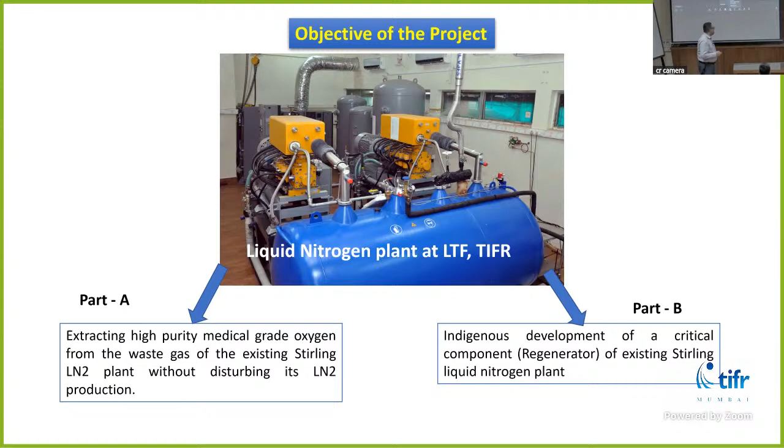Now, to make you more convenient to understand, the nitrogen plant operation is something like this. We have a compressor where atmospheric air gets compressed, then it's purified basically to remove the moisture, hydrocarbon and carbon dioxide. Then it passes to the gas separation where it gets separated into oxygen and nitrogen, and the nitrogen gas is collected and then gets liquefied in this liquid nitrogen plant.

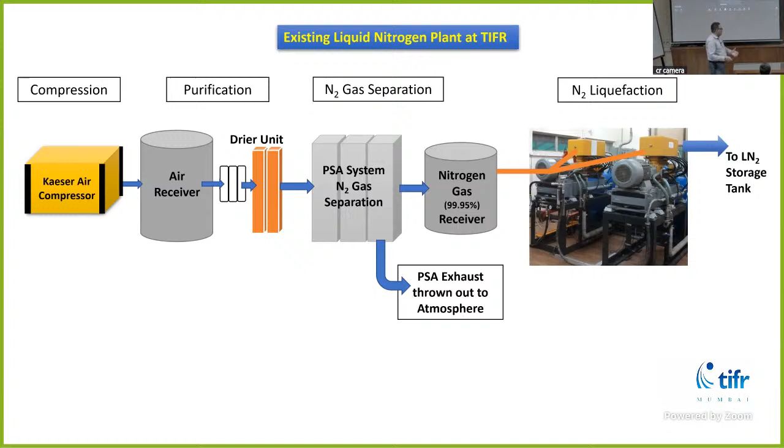Now here, the PSA, what is PSA, is like a pressure swing adsorption system. So one system will be used while the other will be in regeneration mode. I will explain in the next slide. So this PSA exhaust, the waste gas, is thrown into the atmosphere, which is our point of study here.

Now when we are doing this PSA separation of oxygen and nitrogen, which is a very standard technique, it is based on the absorbent selection. If the absorbent is carbon molecular sieve, it has a capacity to absorb oxygen and release only nitrogen. So if this carbon molecular sieve is filled in this tank, when you pass air through it, all the oxygen gets trapped into the absorbent and the nitrogen goes out as the product gas, which is then liquefied.

Now if I change this adsorbent to zeolite, the zeolite has a capability to absorb nitrogen and release oxygen. So by changing this absorbent, the current plant can be converted into a liquid oxygen producing plant or a nitrogen producing plant. But it is only one at a time, not both. So it can work as either nitrogen production or oxygen production.

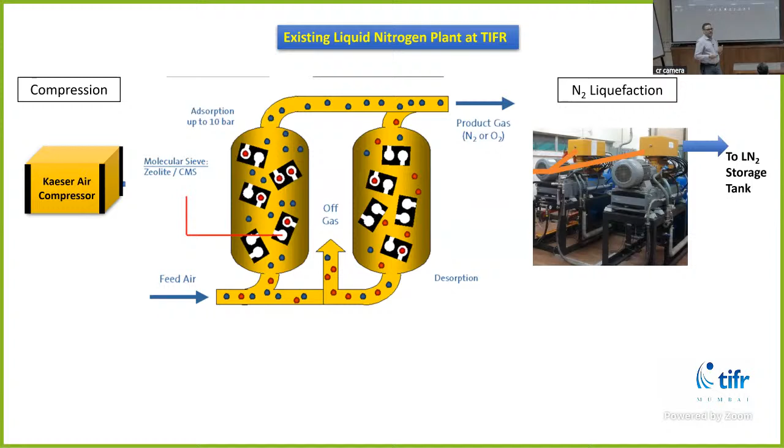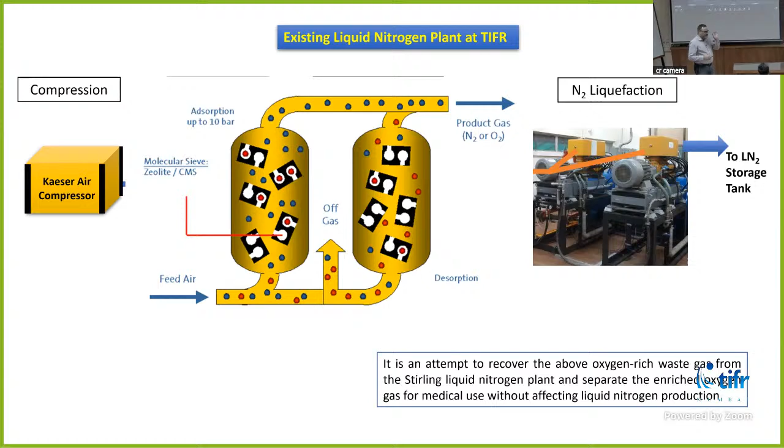Whereas our objective is, without disturbing this CMS or the nitrogen producing process, how do we get out the oxygen? That is the whole challenge here. So the attempt is to recover oxygen-rich gas without disturbing this liquid nitrogen production. That's the main catch point in the whole project. How do we go about it?

As a basic methodology, the gas we get from the PSA exhaust, oxygen-rich air, gets condensed in a condenser. For condensing, we use the liquid nitrogen produced from this plant. When the gas condenses, it becomes liquid air, oxygen-rich base, and it goes to our cryogenic distillation where, based on the boiling point, it gets distilled, and we throw out all the nitrogen and get high purity oxygen.

Whereas the actual process has a lot of components: a pre-cooler, condenser, distillation column, recondenser. So many components are there. We need to monitor various parameters like mass flow, pressure, temperature, level sensor, and purity. These all need to be monitored to have process optimization so that you achieve high purity or medical grade oxygen.

So this talk will describe, the first portion of the talk will describe the development of a process visualization screen in LabVIEW, which combines a monitoring tool and also a data logging tool. That is what they are going to present in the first part. So the preamble is that it is part of this project; only the development of the screen, the automation part, is the focus of today's presentation.

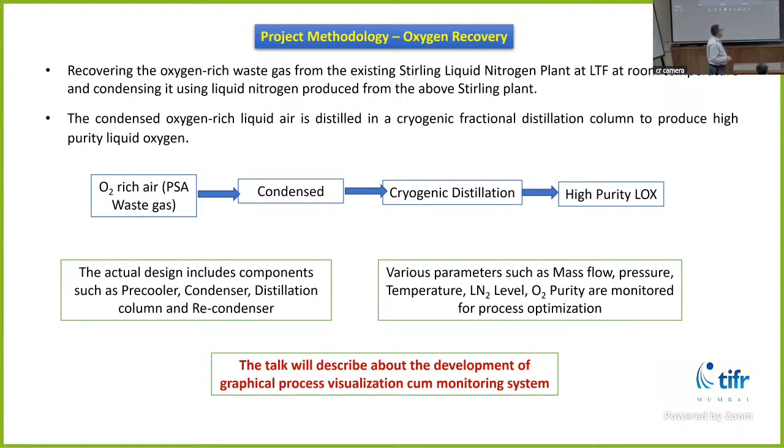And this typically shows the density of the work, where we get the oxygen-rich air. So you have to measure various values. Then it goes to a condenser that is filled with liquid nitrogen, gets condensed, and then goes to a distillation column where it gets distilled, where we get the high purity oxygen which gets collected in this tank.

Whenever we optimize the process, whatever cold vapor results because of the hot air coming in, we have to reutilize it using pre-cooling so that the usage of liquid nitrogen is reduced. So the gas going in gets pre-cooled with the vent gas, which is anyway thrown out.

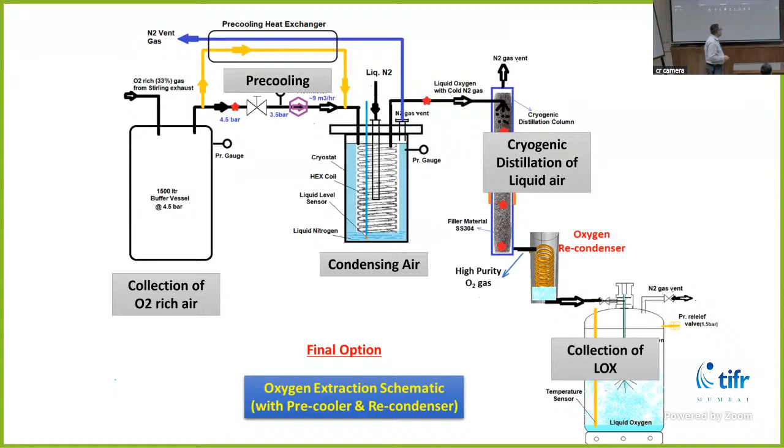Now coming to the second part, the first portion is what we have up to here. Now we are going into this cryogenerator part. This works on the Stirling, reversed Stirling cycle based thing, where the working medium is usually helium gas. The helium gas is subjected to compression and expansion process. That compression leads to an increase in temperature and expansion leads to a reduction in temperature. So it's in a closed cycle.

It goes out in a synchronized manner such that the gas is continuously compressed and then continuously expanded. So this portion gets cold over a cycle because this runs at a very high frequency, from 36 hertz to 50 hertz, in one revolution of the crankshaft.

So these are all the components. You have a piston, so when the gas gets compressed, it gets cooled with a cooler. Then it passes through the regenerator, which is of our interest. Then it goes here and gets expanded. So when the nitrogen gas comes here, it gets condensed. During this, these components are part of the cycle.

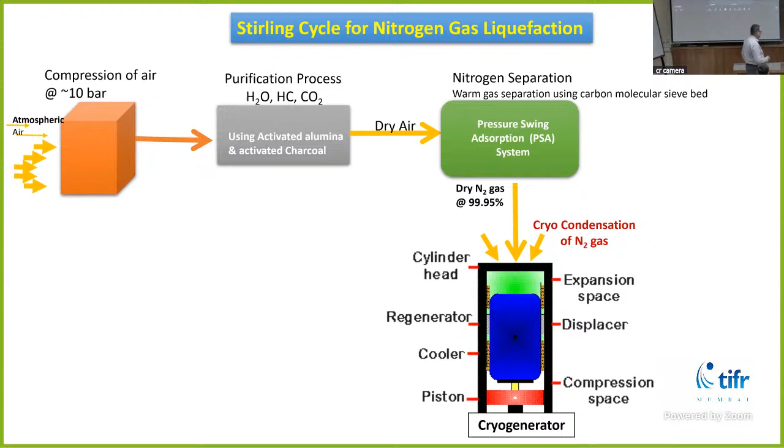So now the regenerator is nothing but a heat exchanger. Normally there are two types of heat exchangers: recuperative and regenerative. This is a regenerative heat exchanger, where the gas can go in one direction but does not come out at the same time. In the next cycle it comes back in the reverse direction, the same path. So it is the heart of this plant.

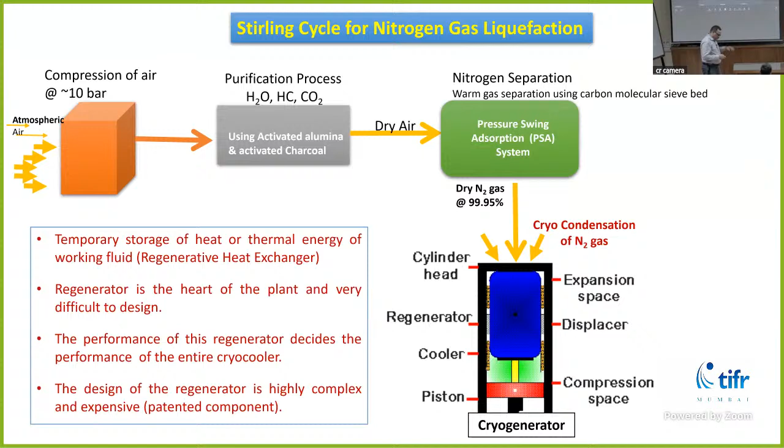The performance of this component will decide the performance of the cryo refrigerator or cryo cooler. The performance and design is highly complex because it's patented. This plant design is from the 1950s, because nobody could come up with a much better component that could be used for commercial and large capacity plants. So it's a bit complex, the design of it. This is what we wanted to work on, to place more emphasis on it.

When the cycle operates at high frequency, the temperature of the expansion space keeps changing. What we are interested in is the regenerator here - this is the inlet and this is the outlet. So I will show the next component. The outlet of the regenerator, the gas keeps going down and down. So if you see at the compression space, the temperature increases, the cooler brings it back, through the regenerator and into the expansion space.

The point I would like to mention is, the temperature at the inlet is the same, and the temperature at the outlet of the regenerator keeps coming down to a saturation temperature, going up to 65 to 50 K, depending upon the gas and the operating pressure. It has a large value depending on the frequency. So the typical regenerator effectiveness should be designed up to 99.7%, which is the actual value. Designing a regenerator or heat exchanger of such high effectiveness is very, very difficult.

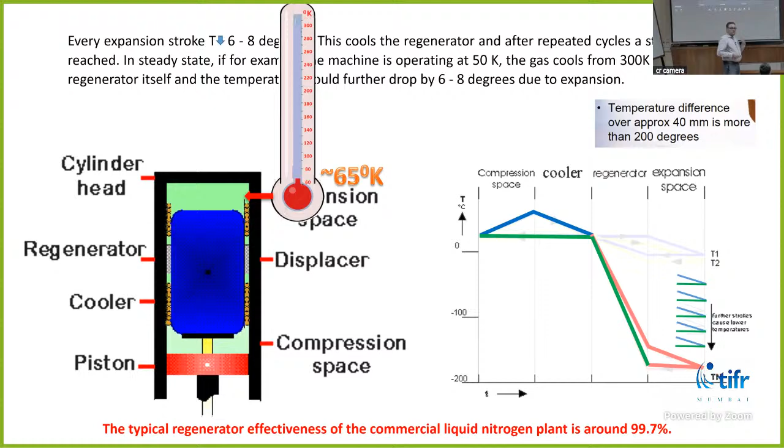And the regenerator component is about 40 mm in height. You see, one side is 300 K and the other is about 50 K. So there's a huge temperature gradient. This also gives an idea of how critical the component is.

The actual regenerator used in the existing plant, the patented version, consists of many such layers. It is a woven wire mesh - not a net, a woven wire mesh. Many such layers are stacked to form a shape. This is about 50 mm - this is the height of it, 49 mm, and it's about 100 mm diameter. So it's such a small portion.

And then this inlet is 300 K. Here you can go down to 50 K or so. This is an actual SEM photograph of the thing - about 30 micron.

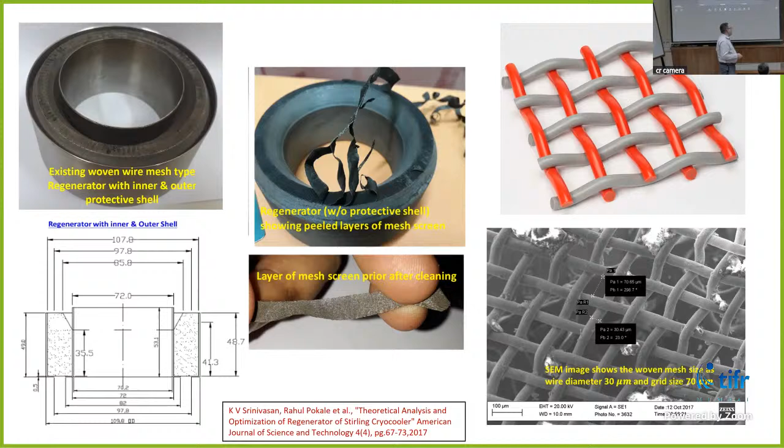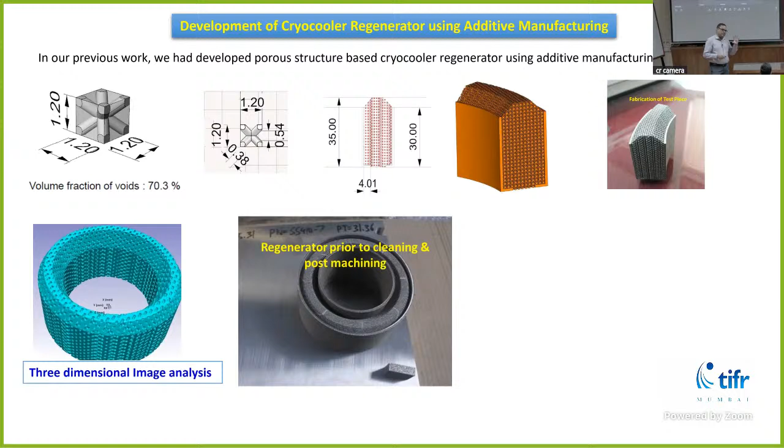So now, what we did as part of our previous project, after detailed study, was develop a BCC lattice structure with the same amount of porosity, keeping packing density constant. Based on the CAD modeling, we made a three-dimensional print using additive manufacturing to get the proper result. In fact, this was the first component ever made in cryogenics this way.

To reach cryogenics in one shot - there may be components which may need something more to give it - so it is a single ready-to-use component which can go to cryogenics. This was one of the things, and we have a much referred paper. This is what I presented in the last one, in 2019.

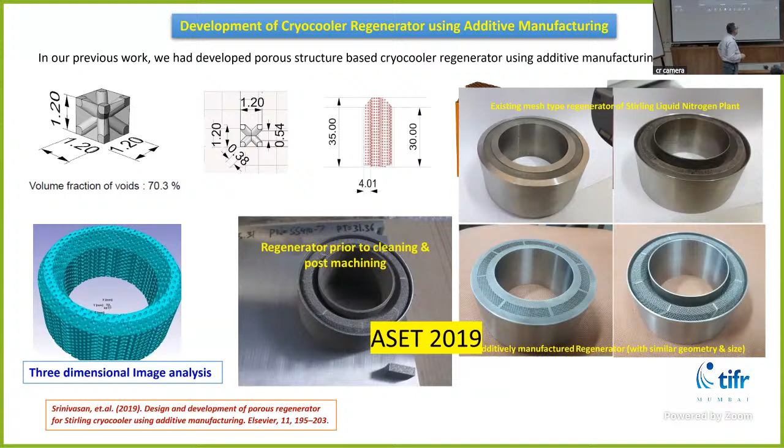In this current project, after the previous one, we have made many changes in the lattice structure and other components. What we are going to focus on in the second part is changing the porous structure in the lattice component and the structure.

We also want more contact of the gas with the matrix, what we call the metal part, and this gets improved by adding some baffles. So the current exercise is to add baffles in addition to this porous structure, and to make a material and study the fluid dynamics so that the output of this study would go directly for additive manufacturing.

When you do that, a lot of things have to be checked, whether whatever we design can actually be printed or not. So that we need to check. That is what the second project is about. This is actually the preamble to this whole project.

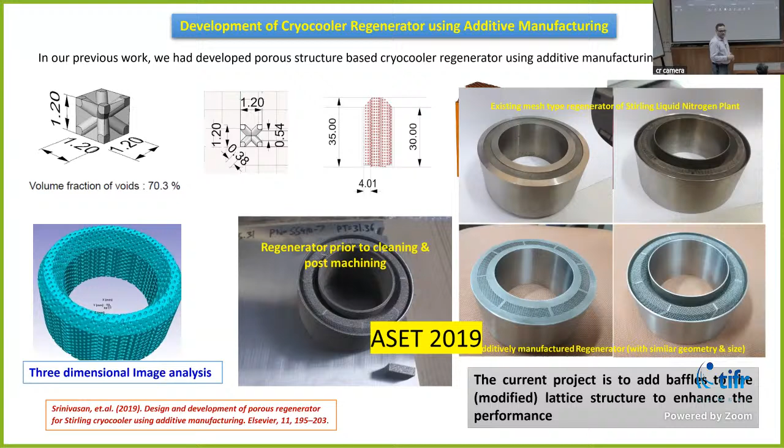Now I will ask this first group to present their work regarding oxygen separation, automation, and the oxygen separation. Please.

Good evening everybody. I am Woodrow Gonsalves, along with Saiesh Vandkar and Srushti Hallur. We're going to be talking about the addition that we've done to the liquid nitrogen plant.

Majorly, it is a data acquisition system based on LabVIEW. What I mean by data acquisition here is to digitize the analog signal, to sample it, and to store it. So that is as far as my definition of data acquisition goes for this project.

I would now like to call upon Saiesh to take us through the objectives. So in the beginning of the project, Sir described or briefed us on some of the objectives, like what he wants at the end, how the end product should look like.

Coming to the objective, the first objective was to have process visualization, by which I mean that whenever a layman sees the main screen of the LabVIEW, he or she should be able to know what is going on in the plant, or what processes are required to get the pure oxygen at the end.

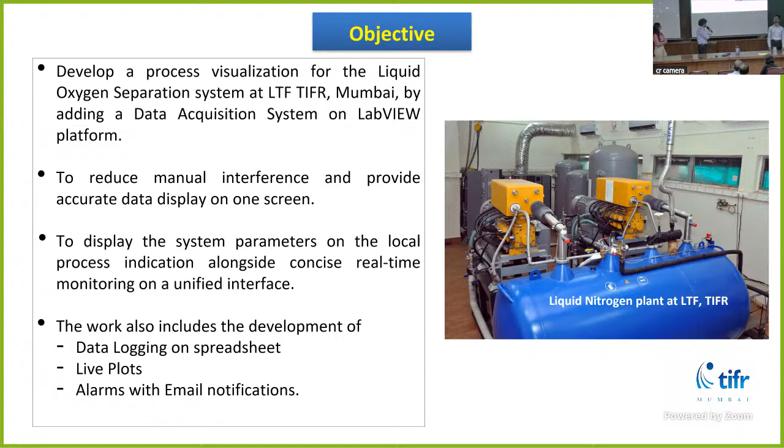In the fourth point, you can see there are three subpoints, which will be explained later in the presentation. Now me and Woodrow would take you through the hardware aspect of this whole project.

As I say hardware, you should be very careful about what you choose to run that hardware system. You should choose the devices and instruments according to your requirements, adhering to the specificity. We have chosen these five sensors: first is temperature sensor, second is pressure sensor, third is oxygen purity, fourth is mass flow meter, and the fifth is liquid nitrogen level sensor.

You can see in these three there is a local indication of the values, but the temperature and pressure sensors don't have any. So to tackle this problem, we chose this process indicator of Selec. There is a particular reason we chose this peculiar process indicator, so Woodrow will further explain the reason.

Now I will come to the main component, the heart of our system, which is the PCI 1805 card. This is the data acquisition card, which helps in converting all the field data and digitizing it before sending it to the computer.

Now you may ask how we connect this PCI card and gather all the field information. This is the terminal block of Adam 3962, which acts like a mediator between the field signals and the computer. The terminal block is connected to the PCI using female connectors. Now I would call Woodrow to further emphasize the hardware part.

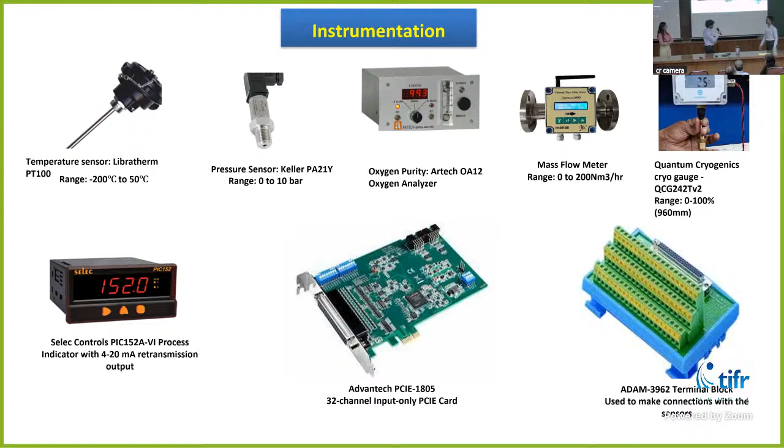So the liquid oxygen plant is divided into 5 parts, and each part plays an important role in terms of the parameters that have to be monitored. This slide is supposed to give you a visual representation of the system that we've built.

It starts with this sensor, which is connected to the process indicator that you can see locally. Then the output of this process indicator, in terms of its retransmission output, goes into the terminal block, and via the DB62 cable, it is attached to the PCI card, which is fitted into the CPU. Further, it takes over into LabVIEW, and the processing happens ahead.

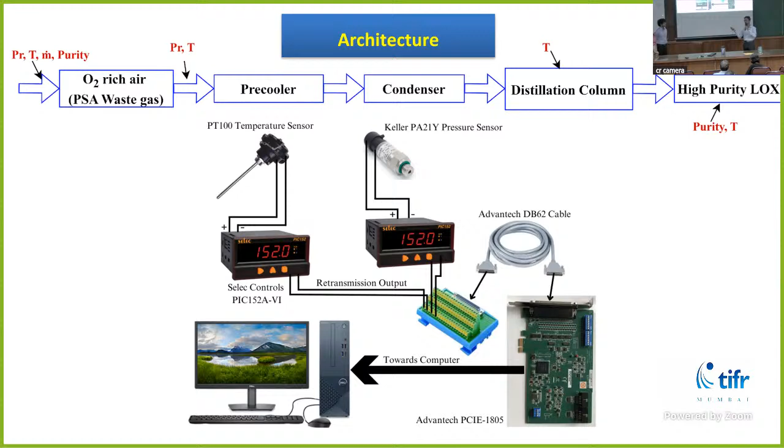To talk about the connection diagram, the transmitter is working in a 2-wire mode. What I mean by 2-wire mode is that you're powering the sensor and getting the signal using only 2 wires. How am I doing that? By using the 24-volt onboard DC supply of the process indicator itself.

Now, to measure the output, which is in the form of a 4 to 20 milliamp current loop on the input side, it's being measured by the onboard milliammeter of the process indicator. Parallelly, you have an isolated output. The reason for taking this output is because if you add both in series, it becomes a problem. So there is an isolated output in proportion with the input loop.

This output produces current in proportion with the input current. So the output current goes into the data acquisition card, where it's digitized and further displayed.

Now, that was all about the hardware part and all that you needed to know. Now, to guide you through the software part, Srushti would take over.

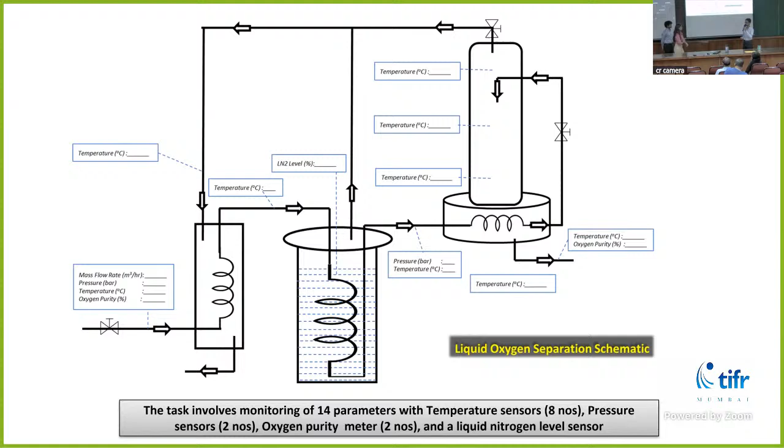So what is LabVIEW? LabVIEW stands for Laboratory Virtual Instrument Engineering Workbench. Unlike other traditional programming languages, LabVIEW has graphical blocks known as virtual instruments, or VIs, that are used to design control systems or automate measurements, and we can visualize data efficiently or create applications. LabVIEW is a graphical visual programming environment that was developed by National Instruments.

Further, I have included certain major codes that we have developed throughout the project. First, I will go through the database part. What is a database? It is very important because all the data coming from the sensors gets appended at one location, that is, a Google spreadsheet in our project. Yes, we are using Google Cloud over here.

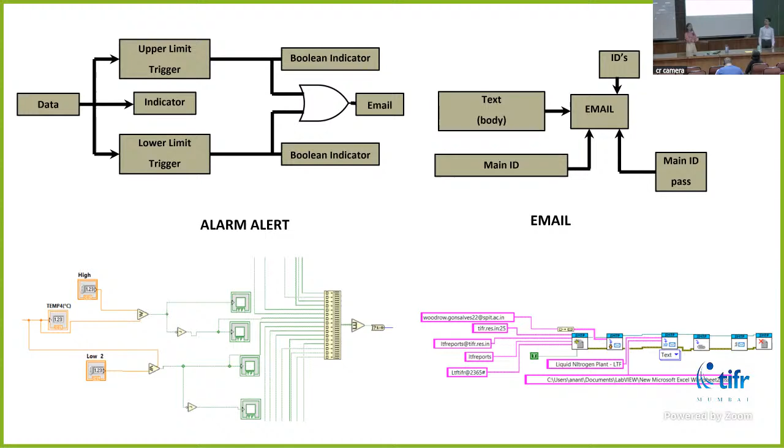A disclaimer to all of you: we have checked all the parameters and they are working, but due to some technical issues, we were not able to install the oxygen plant currently. So in some areas, some parameters will show garbage values allocated by the system. Kindly please ignore it.

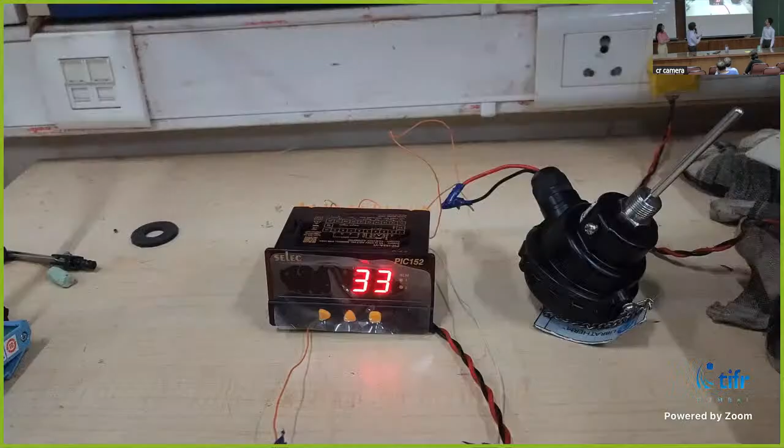As you can see, there is a temperature sensor connected to the local process indicator, which is connected to a terminal block, and via cable, the signal goes into the PCI card.

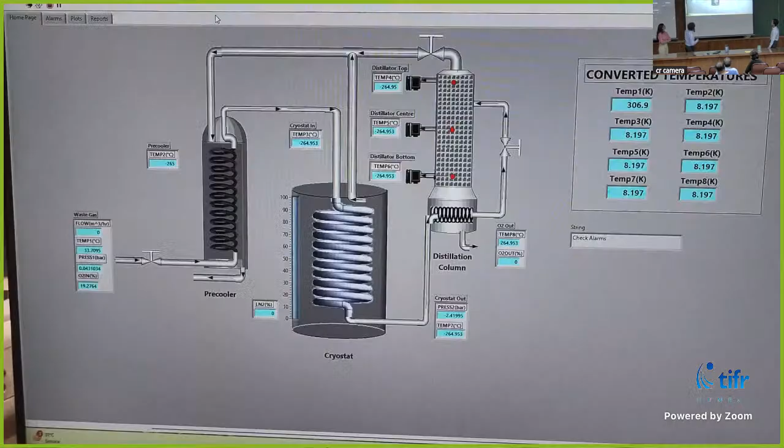This is the main screen where you can see the temperature and the live reading of the oxygen purity as well. Srinivasan sir wanted temperature converted to Kelvin, so this is the reading which is converted live.

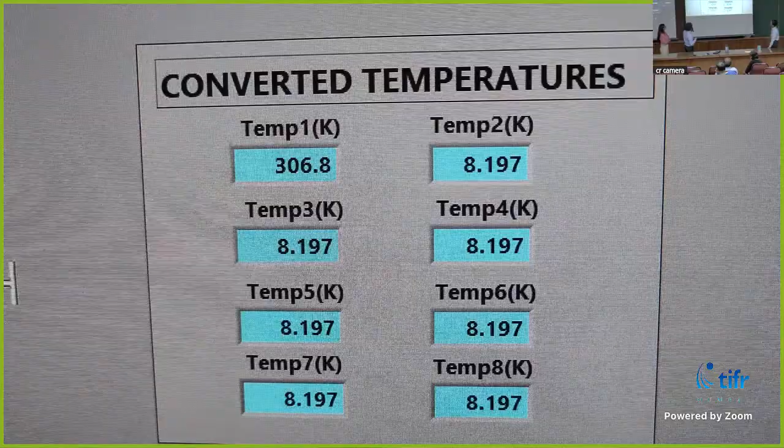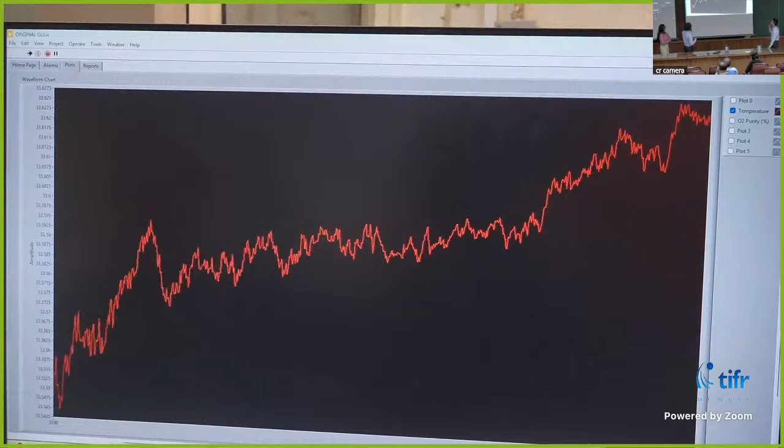So these are the plots. This one specifically is of temperature. As you notice the ups and downs, these are not noise. As you can see, the scaling goes to 3 to 4 decimals.

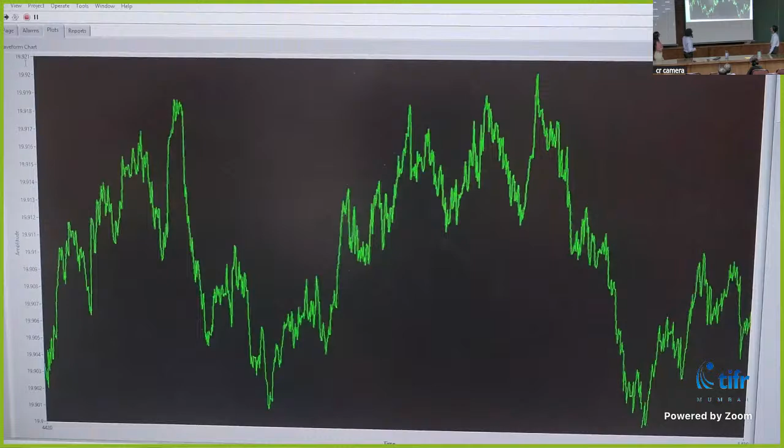Now we will show the Google spreadsheet, where you can see the live data, timestamp, and the date, month, year.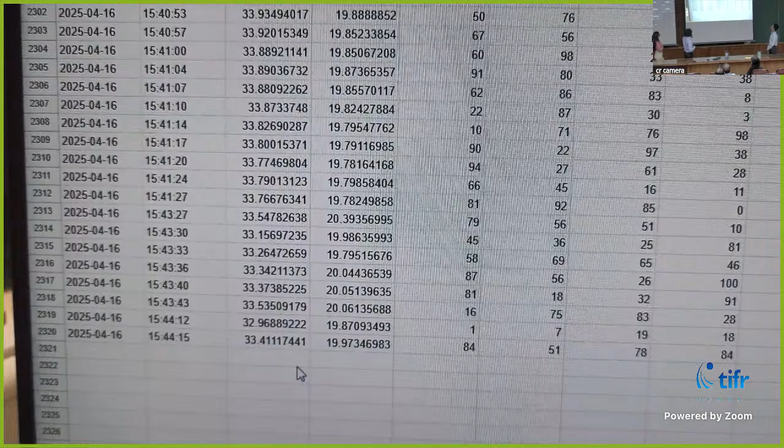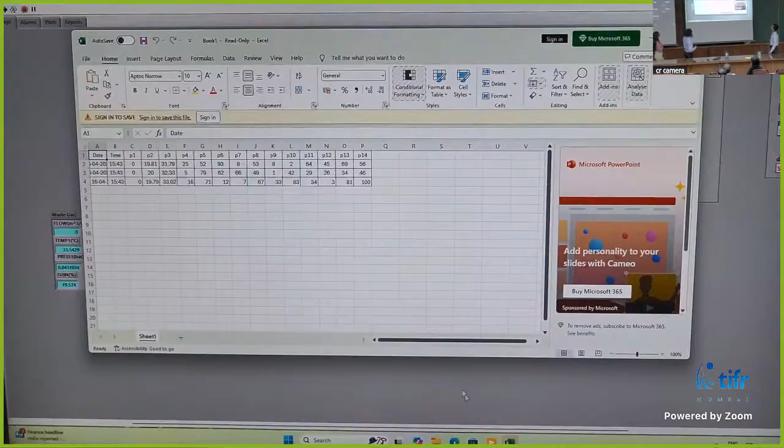Now as we start the process, the Excel sheet is opened, and again there is live data, timestamp, as well as the date and year. In the alarm, if we have set a high threshold and it passes, see the alarm went off, and we got a mail.

Now I would like to call Woodrow to summarize the results and outcomes and to present further.

So what have we done so far? What have we achieved? As he mentioned, there was a disclaimer. The whole system hasn't been set up together; it's been set up in different parts, and we are successful in testing each and every part.

Finally, we've achieved a graphical user interface. There has also been local process indication, along with simultaneous monitoring of the screen.

Another important part is that this work was recently submitted to the International Conference on Advances in Science and Technology, or as they call it, ICAST 2025.

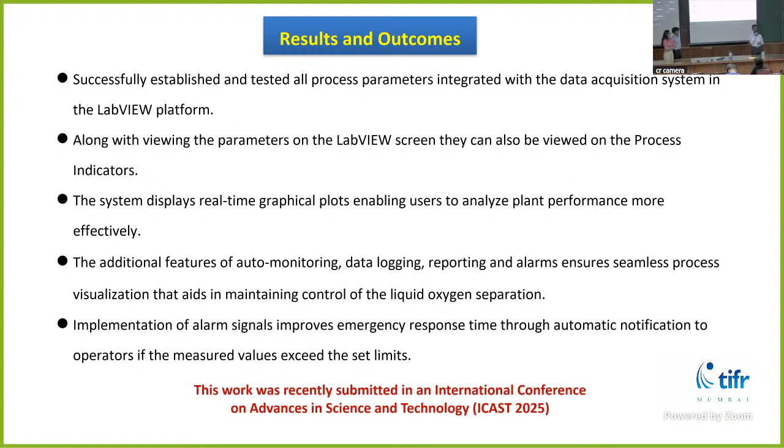Future improvements to this work include SMS notification instead of email, which can then be received online, as can an email alert. The distillation column still needs some sort of manual control, which is negligible, but it can be done further using LabVIEW, not just through our system.

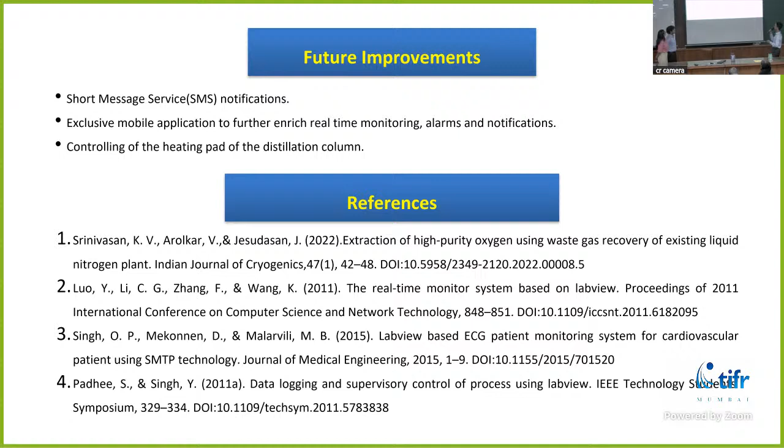These are the references. Finally, I would like to thank our mentors for guiding us throughout this project: Dr. K.V. Srinivasan sir, Tulsiram sir, and Satyanarayan sir.

The aim of the LTF staff is always to help us, and they have quite established that in helping us in our project continuously, Ms. Karande sir, who has helped us, and Avinash sir.

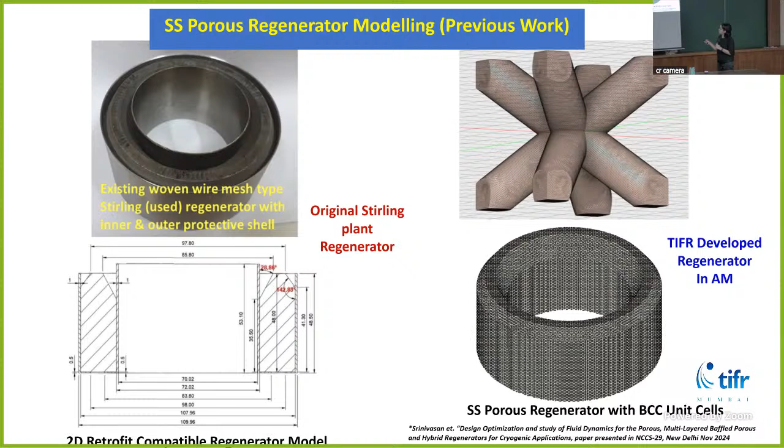We then move to the ANSYS Fluent simulation software, where we conduct computational fluid dynamics, or CFD, simulations to analyze the temperature, pressure, and velocity drops across the baffle type porous regenerator. We target a higher temperature drop and a higher velocity drop, as well as a minimal pressure drop, to increase the efficiency of heat exchange and cooling throughout the regenerator.

We take these results and initially compare them with previous work on the baffle-free stainless steel porous regenerator. Then we cross-verify them with results obtained again from REGEN 3.3. Additionally, we conduct a stress analysis on the BCC structure using ANSYS Fluent software to identify the maximum von Mises stresses that develop throughout the porous structure when subject to the working pressure and temperature.

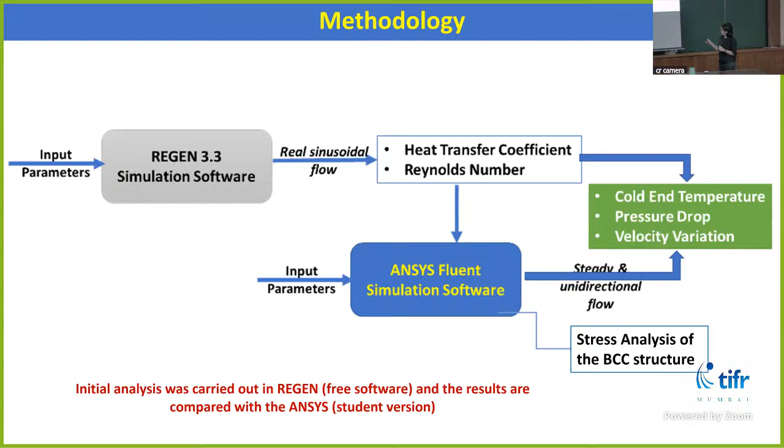These baffles were designed with key objectives in mind. To increase the residence time between the gas and the matrix, 2,500 baffles were designed and modeled in 10 rows with linear high density packing and a 7-degree gap. Additionally, to minimize obstruction of gas flow and minimize pressure drop, the baffles were aligned crosswise with each other and positioned in the corners of the matrix.

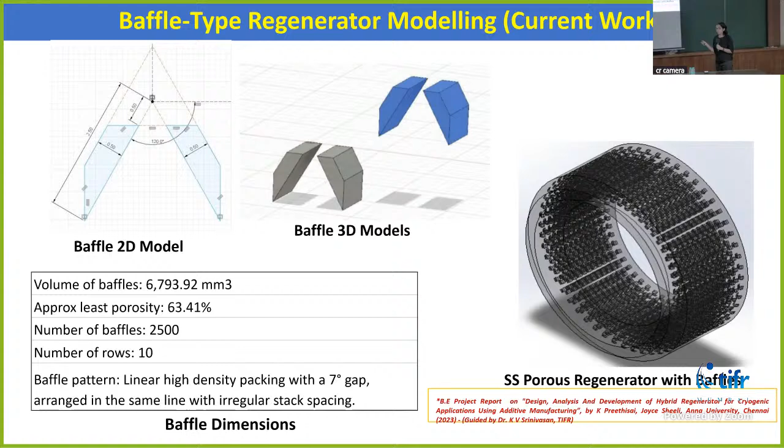Now we move to the first step, the REGEN3.3 analysis. The inputs were chosen to closely model the actual working conditions of the LTF plant. The working fluid was helium gas, the matrix material was stainless steel 316L, the pressure ratio was 1.25, the average pressure was 27 bar, and the inlet and outlet temperatures were 300 and 30 Kelvin. The other input parameters are tabulated here.

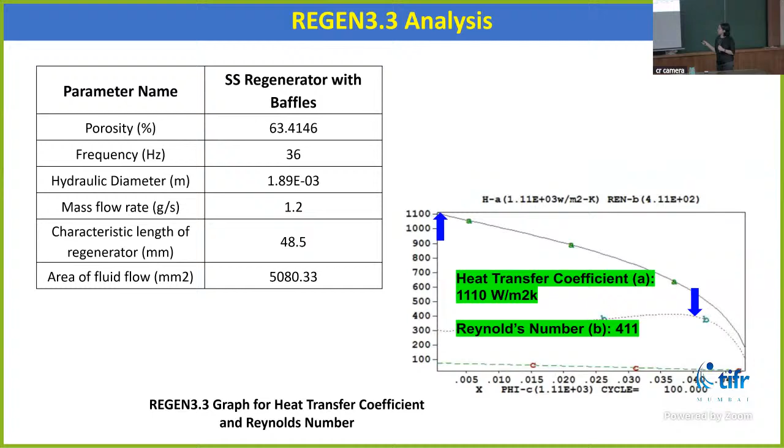REGEN3.3 was first used to calculate critical input parameters for the ANSYS analysis, namely the heat transfer coefficient and Reynolds number, shown in this graph. After that, REGEN3.3 was used to calculate the pressure drop, temperature drop, and velocity drop across the length of the regenerator, to later cross-verify and validate the results obtained from ANSYS. These values were taken at the outlet of the regenerator and at the final cycle, or endpoint, of the simulation runtime.

Now we move on to the ANSYS flow analysis component. For ANSYS, we considered a configuration with steady state flow with absolute velocity and pressure formulation. Let's begin with this table, which first shows the simulation inputs at each window of the ANSYS software. For the mesh metric, or element quality, we targeted as high a quality as possible, and we obtained an average of 0.74 with a maximum of 0.98.

For the cell zone conditions, we defined the regenerator as a porous body. To calculate these values, we first obtained critical inputs from the CAD model directly, such as the volume of fluid flow and the wetted area. We used formulas established in the literature to calculate values such as the relative velocity resistance and the inertial resistance coefficient.

Based on the Reynolds number from the REGEN3.3 analysis, which was lower than 2000, we selected a laminar flow model to represent laminar flow conditions. We kept the energy model on to account for heat transfer, and the heat flux at the walls was considered to be 0 for simplicity of analysis, since it was assumed there was no lateral heat passing.

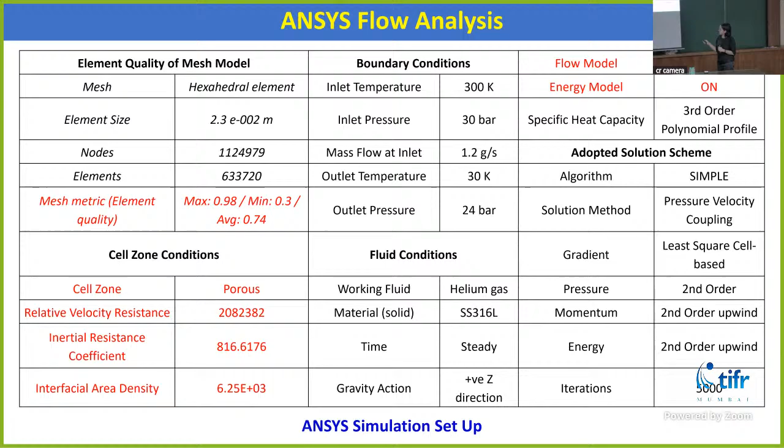Now shown here are the outputs obtained from the ANSYS software. We have the pressure, temperature, and velocity variation across the length of the regenerator, taken at the outlet. Here is the graph of the scaled residuals from ANSYS, which indicates that the errors converge to mostly acceptable limits after about 5,000 iterations, indicating solution accuracy.

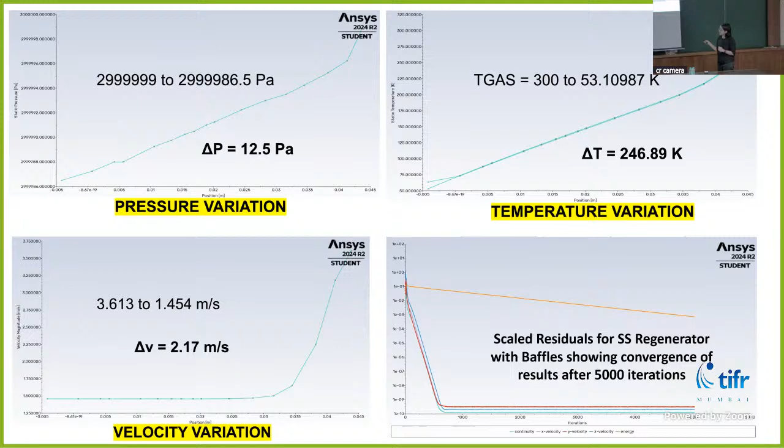Now we have the stress analysis component. This involved applying the working pressure to the lattice structure in order to observe the maximum equivalent stresses that develop in different areas of the structure.

To do this, we first imported a single unit of the BCC unit cell into Fusion 360. We created a linear pattern and added walls at the edges, following the procedure established in similar literature, but for slightly varying dimensions.

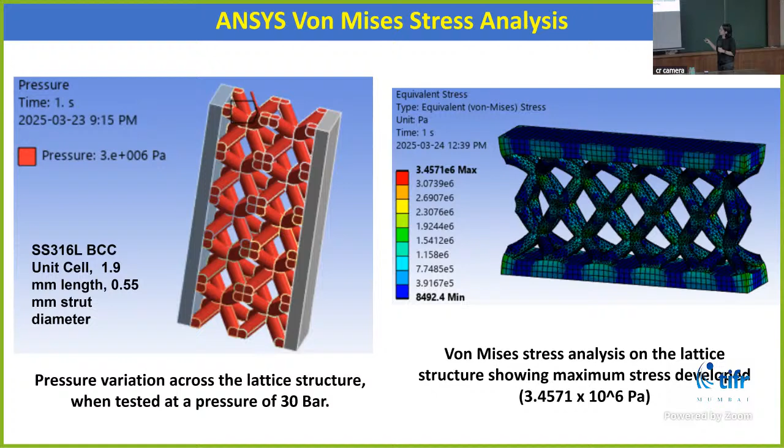Once we had this, we applied a pressure of 30 bar throughout the entire porous structure, and you can see the distribution of the pressure in this diagram. In this diagram, you can see the distribution of the equivalent stresses that develop in different parts of the porous structure, which is the result of this analysis.

So now we move on to the overall results, beginning with the flow analysis. First, we compare the ANSYS results for the baffle type regenerator to the results from the previous work, which were also obtained from ANSYS. You can see there's a significant improvement in the temperature and the velocity drop when comparing the baffle type regenerator to the SS porous regenerator.

There is an improvement from 104 to 246 Kelvin in temperature drop, as well as an improvement from 1.7 to 2.17 meters per second in velocity drop. This is an indication of improved heat exchange and cooling efficiency throughout the regenerator when the baffles are added.

With the pressure drop, however, a slight increase can be observed. It is extremely minimal, only a 2 Pascal increase from the previous, and 12.5 Pascals in total, which is almost negligible when looking at the working pressure of 3 megapascals. So it doesn't impact the efficiency of the regenerator.

Then we compare the ANSYS results to REGEN3.3 to cross-validate, with the understanding that REGEN3.3 is a software that models pulsatile flow, which is more accurate to real cryocooler conditions, while ANSYS assumes steady-state unidirectional flow. You can see that some trends are definitely matched as per REGEN3.3.

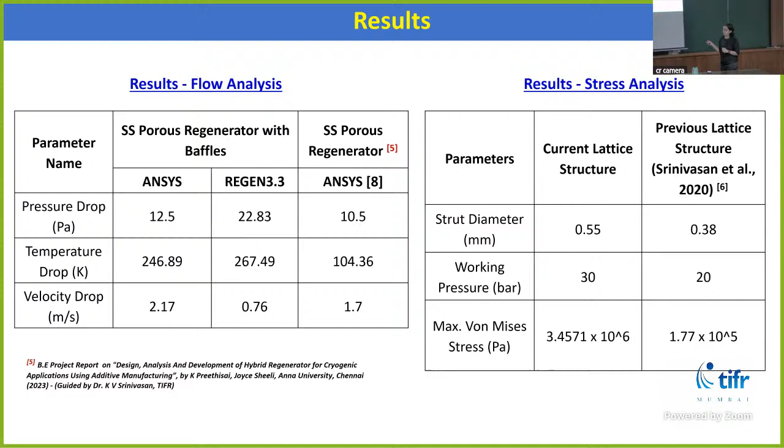So here we have some further details on the results. For ANSYS, about 25 iterations were conducted. The input parameters were varied from iteration to more closely model the cryogenerator conditions, and additionally the meshing had to be refined and fine-tuned to have higher element quality. Each iteration took about 2 hours on ANSYS to complete, and this was done over 4 months.

Similarly, in REGEN3.3, about 10 iterations were conducted with varying input conditions to more closely represent the plant conditions. For example, conditions such as frequency and number of cycles were varied. The current work has already been presented at an international conference, with the paper currently submitted to the Research Plateau Current Trends in Engineering and Technology journal, which is under review.

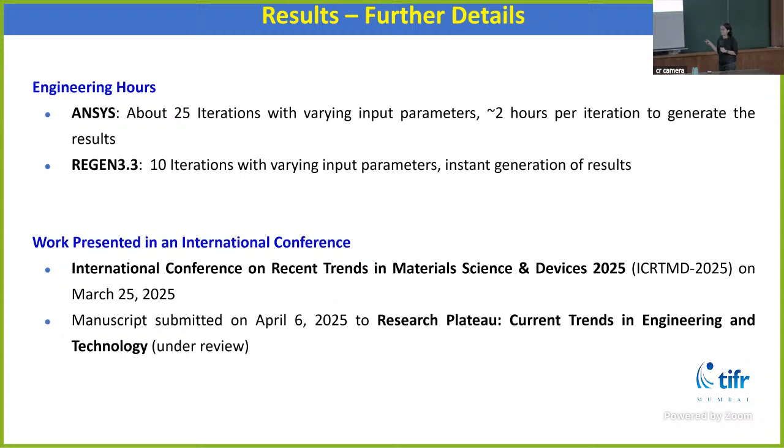So this brings us to our discussion. In conclusion, the SS porous regenerator with baffles showed significant improvements in heat exchange and cooling efficiency, seen through improvements in temperature and velocity drop, as well as a minimal, almost negligible trade-off in pressure drop. These results were cross-validated by REGEN3.3.

As for the stress analysis, the current lattice structure did show a slightly higher maximum von Mises stress than similar literature, but this is completely acceptable since it is much lower than the yield stress of the material. However, it may signify room for further optimization of the design.

As for limitations, the current study used the ANSYS student version, which comes with limitations in the number of nodes and elements that can be employed, which may limit the solution and results accuracy.

Furthermore, as previously mentioned, ANSYS was the main simulation software employed in the study, and ANSYS models steady state flow conditions, not transient or pulsating ones. So this may not give us the best idea of how the regenerator would behave in real conditions, but it does allow us to compare to prior work, and we can still take it into account while acknowledging the REGEN3.3 outputs, which can give a better overall picture.

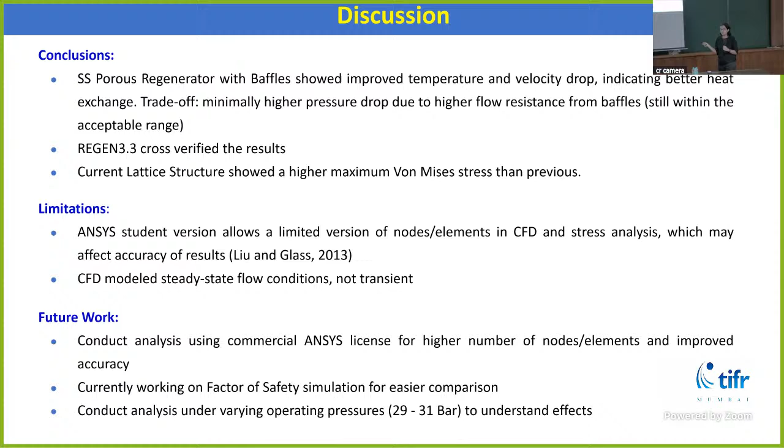We also aim to conduct the analysis under varying operating pressures to see what effect that has on the stresses that develop within the lattice structure, as well as on the temperature, pressure, and velocity profiles.

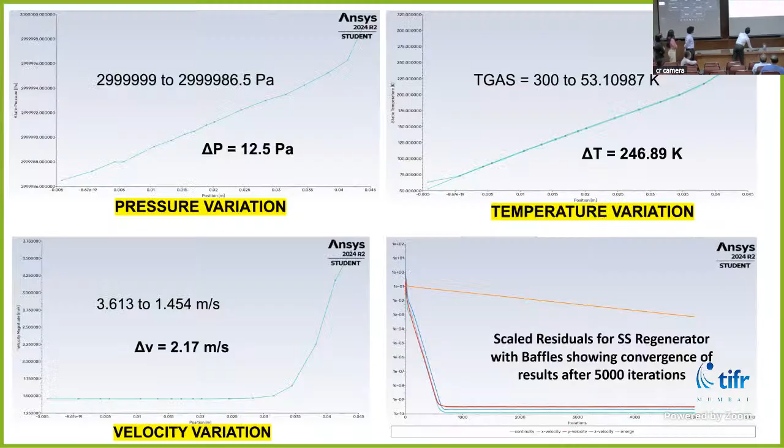Can you please go to the signal chain? Before this, yes before this. So from this local HMI to the terminal box, is this signal analog or digital? It's still analog, it's still analog.

So this sensor and the local HMI side is remote, and this terminal block and digitization system is also remote, far away. So do you think this analog signal is prone to noise if we digitize it right at the sensor level and transfer digital data instead? Would that be any better, you believe?

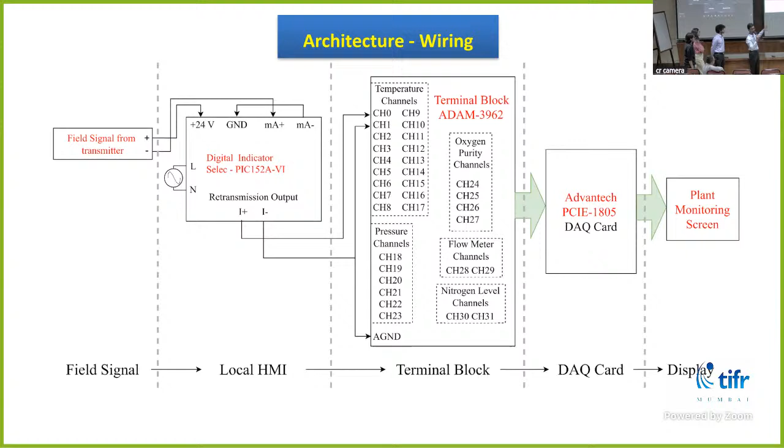That was a very interesting question, I was expecting this. The problem with that system is that we won't have any flexibility. Currently we digitize at our end, so you won't be able to alter the sampling rates, and you won't be able to have it done in parallel. You're talking about a system digitized right there, which sends data itself in packets that go serially. This way, everything is happening in parallel.

I can access any parameter at any moment of time. Given that we already had this data acquisition card with us, we went ahead with this system.

All the instrumentation was already procured earlier, as we had a practice of using transmitters with 4 to 20 milliamp output. In fact, all the instrumentation is 4 to 20 milliamp, so we had to live with that. Because of cost economics we didn't want to go for PLC, so we went with this approach, and it was the only option available since everything has a 4 to 20 milliamp output.

Yeah, so I have another question. In the software part, why are you using Google Sheets? Is there any particular reason? I just want to know. There are other options like MQTT, InfluxDB, those stuff. So is there any particular reason?

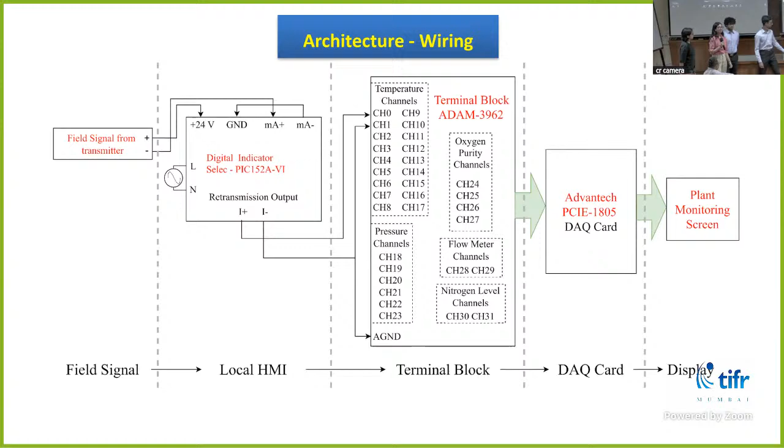We actually tried to use SQLite before this, the database. For a week I tried doing that, but it was not happening somehow. Yeah, it's difficult to use. Exactly. Okay, first of all, Google Cloud Console was free, and it was cost effective, and the database got appended, it got worked in a week itself. So we continued with it and did not try any other.

For other options like MQTT and those stuff, you also have local hosting options instead of going to some server. So if you want data protection and something, this is also a good option. But okay, Google Sheets is much easier to use. But for most of the proper IoT establishment, I have seen mostly they use this MQTT and other IoT optimized protocols.

Is any of your pressure or temperature sensors coming in contact with the oxygen, because some oxygen rich environment may lead to some ignition? So is any care taken for that? I think Srinivasan sir, who has more knowledge, can answer it.

The process is not yet ready. In fact, we have to optimize the parameter based on the input of what we get from this project. So probably, as I said, the distillation column, we need to achieve the temperature of liquid oxygen at the bottom. To maintain it, how to add the heat energy to the column, which will be done by the heating pads. So based on the various temperatures we get, we have to adjust the heat flow. We had some base information from the pre-work, but this will give a complete idea of how to go.

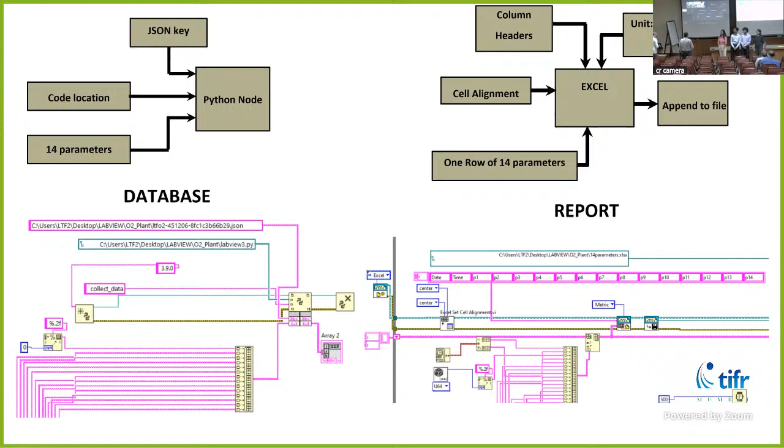Srinivasan, sorry, I was on mute, but really, thank you so much. I'm sure that with the consistent effort which you and your team are putting in, we are very near to success. As director of Sterling India, whatever support we can render, we are absolutely open and eager. Thank you so much.

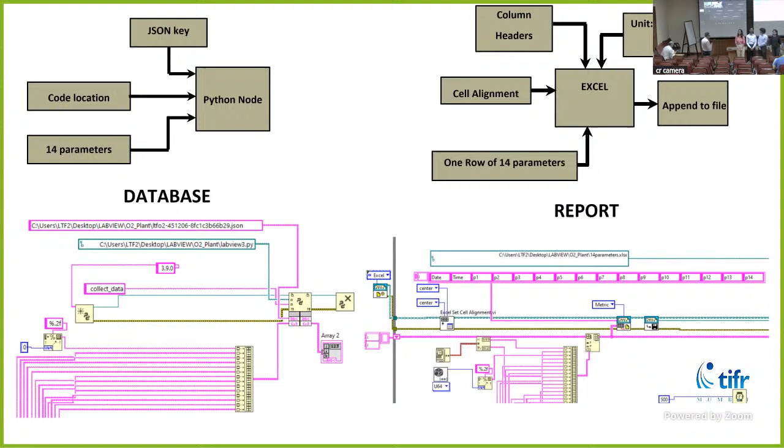I'm listening very carefully, and really, congratulations to all your collaborators, including those from my college, three of the boys and girls. Also, the way you have put up in parallel both the hardware development as well as the simulations for future work done by the other collaborators is a great initiative.

So I can only congratulate you and your collaborators, and hopefully this will lead to further optimization of your system. We are all waiting for your plant to come up so that the system gets tested. Thank you very much. Okay. Thanks, everybody, all the best.